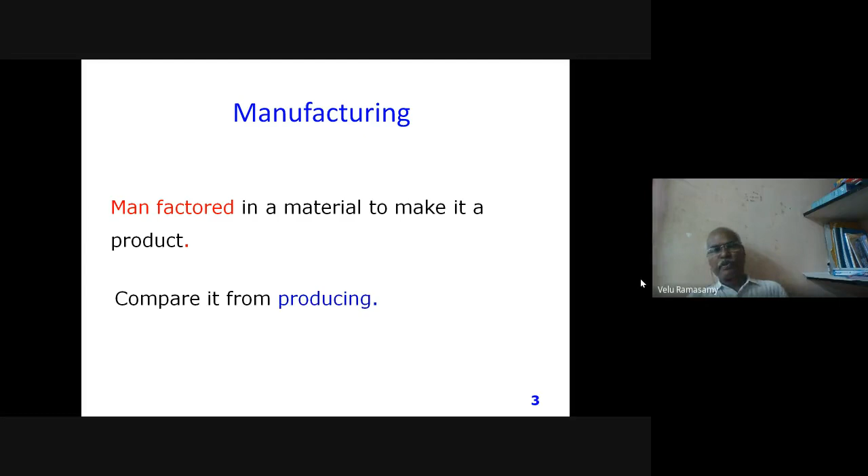Coming back to railway passenger coach - manufacturing is over, and railway passenger coach is something everybody would have seen or traveled in. It's an entity to carry passengers, to carry human beings safely, speedily, and quickly - that's why it is called a coach. The difference between traveling by a lorry or an Ashok Leyland bus and a railway coach is totally different. Railway passenger coach is an entity primarily used for carrying passengers. Compare it to a railway wagon - nobody would like to travel by a wagon. Only one poor fellow, the guard, will be traveling in the last wagon of a goods train, and it will be terribly difficult. But passenger coach is ultimately comfortable - the ride index you cannot compare with anything.

Before proceeding further, since we are going to see manufacturing of railway passenger coach, we will understand what are the subsystems or components in a passenger coach. Broadly, for discussion purposes, we will have the shell superstructure - something like our ribs and webs - then there will be one bogie, called the carrying truck, below the coach, and of course interior furnishing where we sit, sleep, or eat. So these three make a particular railway coach.

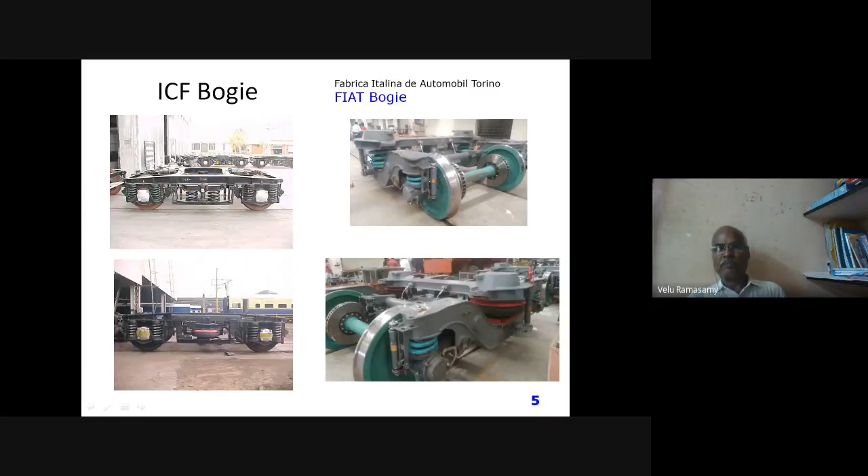So now you can see how simply Fiat has made a bogie, and right from last year, Indian Railways is manufacturing only these types of bogies for our passenger consumption. These others are slowly being phased out. Interior furnishing - everyone would have seen interior.

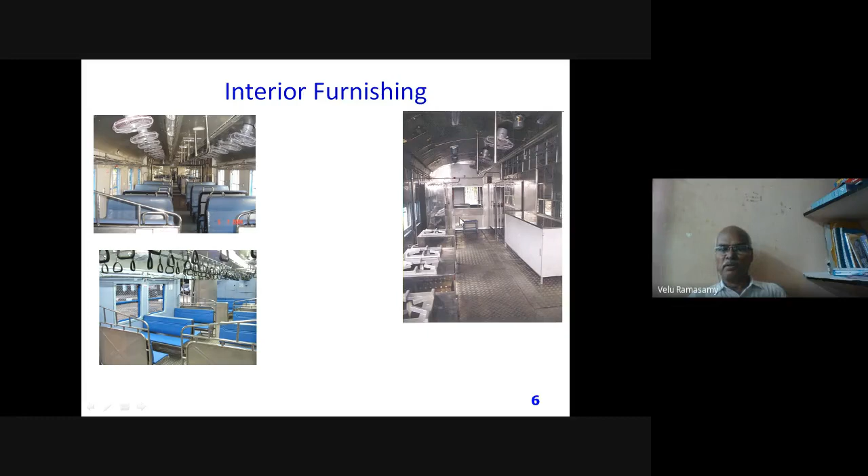Interior furnishing consists of fans, seats, windows, doors, etc., and flooring. Here it is a chair car. Here it is an electric multiple unit that is running somewhere in Bombay or Madras or Calcutta. And this is the pantry car. You would have read in newspapers that slowly Indian Railways is going to do away with pantry cars. But without a pantry car, you cannot imagine a train. Technology is changing though, and everywhere we will be having eatables, so they are slowly doing away with the pantry car. But you can see a wonderfully furnished pantry car, perhaps when you travel in one.

There are three designs that we have been using in our Indian Railways. The first one is the Indian Railway Standard Coach. These were used right from the first train that ran in India, in Bombay, up to perhaps the 1970s. The design was purely British, and you could still see some MG coaches running in remote locations - it is purely riveted construction. Like if you've seen the Howrah Bridge, the entire bridge has riveted construction. In those days, railways did not believe in welding because welding was in its infancy. There was a heavy underframe, something like a chassis in an automobile, and the coach superstructure was constructed over the chassis. So the body was a wooden body. You can see it now perhaps only available in a museum.

The heavy underframe over which wooden body is built. What is the problem here? Since it is heavy, you will be having high power needed for hauling, and the speed will be obviously slow.

Compartments are fewer. Imagine Tamil Nadu Express or Karnataka Express will have 27 coaches. If you haul IRS coaches, you can haul only around 13 or 14 coaches.

And this next one is very important. In case of an accident, one coach will telescopically enter another, meaning it will slide and physically enter the other coach. So you can imagine what will happen to the people sitting in that particular coach.

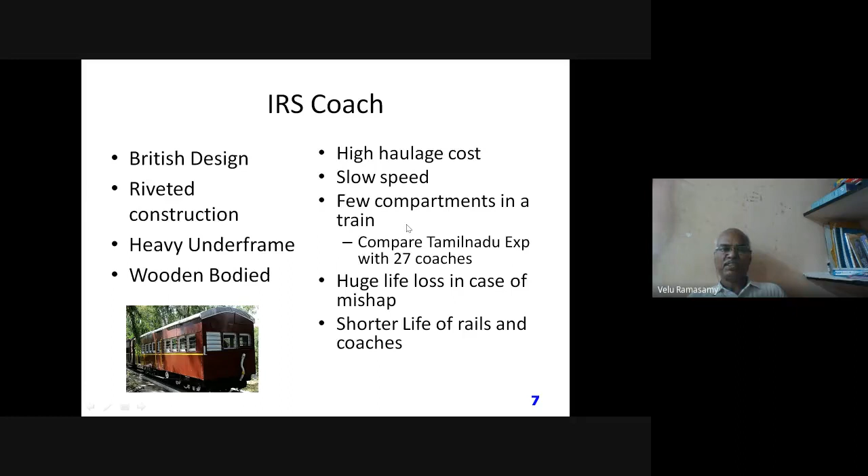Therefore, we have a subsequent coach called the integral coach. Integral coach means the sidewall, roof, and underframe are all completely welded. There is no chassis, there is no wooden body. All are steel and all welded together. It is something like a tube. That's why it's called an integral coach.

The previous one was a chassis built over which a wooden coach was constructed. Here it is integral construction, all welded. By the 1950s, Indian Railway got confidence to go for welding rather than riveting. Riveting is a very cumbersome process, and slowly people wanted to leave riveting behind.

And since it is all light metal, the weight is very less, and the outer sheet will always be in tension. So even if you throw a stone at it, the stone will just bounce off without making an impact. It was also designed to go around 110 km/h.

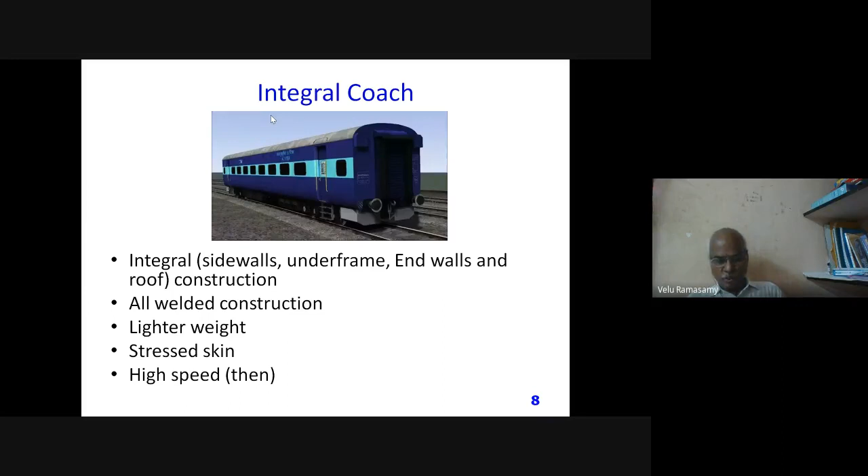Then the Integral Coach Factory was established way back in the 1950s. The third design, which is now manufactured by all the manufacturing units of Indian Railways, is the LHB coach, Linke Hoffmann Busch coach.

You can see, previously I told you about FIAT bogie and LHB coach. Yes, you are right, this coach is a combination of two designs. The superstructure design is LHB, whereas the bogie design, the undertruck design, is Italian.

The advantage of the LHB coach compared to the ICF coach is an enormously higher level of safety compared to the Integral Coach Factory coach. The riding comfort is very nice, and the speed can reach around 160 km/h operating speed, with weight being 10% less.

That is around 35 tons, so 10% means 3.5 tons less. And it's a longer coach. In an ICF AC coach, you have perhaps 8 bays; here you have 9 bays. One bay means 8 seats. So you get around 15 to 20% extra space.

And maintenance is of course very much reduced, and the aesthetics have improved enormously. So these three types of coaches are running in Indian Railways.

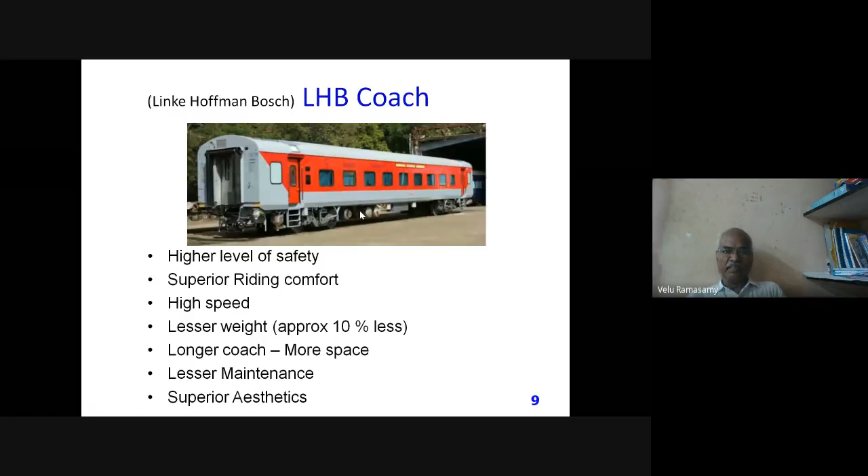Coming back to ICF, where these coaches are built: the Integral Coach Factory started in 1955 by then Prime Minister Jawaharlal Nehru. Initially it was started for manufacturing only 100 third class coaches. You wouldn't have seen any third class coaches, but initially it was started for only 100 of them.

And perhaps this is the irony: even Germany gave a design called the MAN design. You would have seen MAN trucks, heavy duty trucks, in India too, but due to certain reasons we couldn't use that. But now, once again, Germany rescued us with their LHB coach.

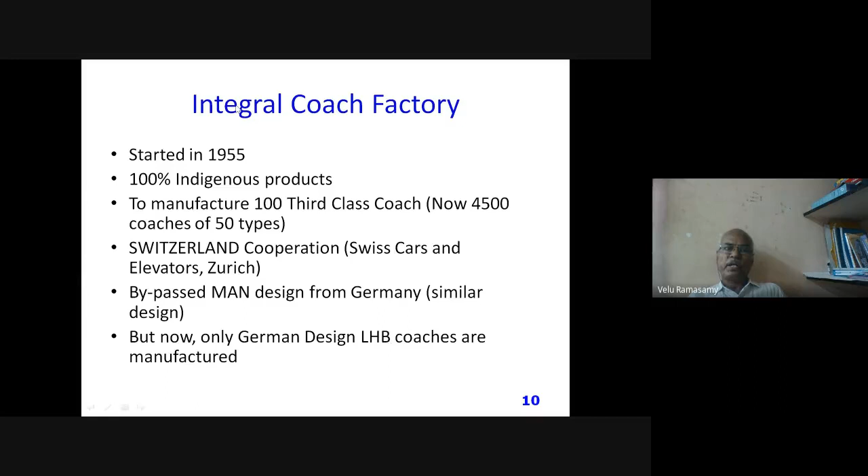So coming back to our production or manufacturing, we take inputs such as sheets, plates, rods, and these rudimentary items, and of course paints. We perform only elementary operations: shearing, bending, milling, welding, fitting, painting, and of course inspecting.

No complicated activity like forging or broaching or something of that sort. Only simple activity, because it is simply rail dabba, a sheet metal body. So the output is conventional passenger coaches or self-propelled coaches like electric multiple unit, diesel electric multiple units, special coaches like inspection cars, and so on.

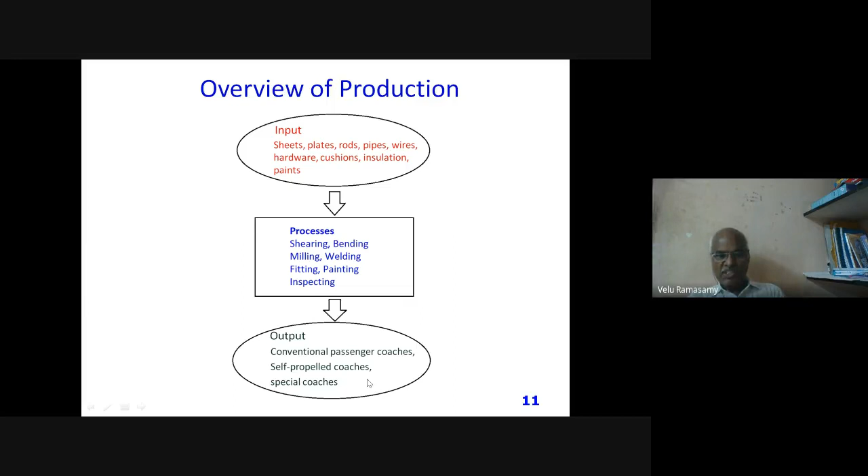Integral Coach Factory here has a layout like this. You would have studied in engineering that we have different types of layouts: product layout, process layout, combined layout. ICF uses all types of these layouts, and that's why it is called a hybrid layout or combined layout. At one side, raw materials enter and get processed. Slowly it moves, and finally when it comes out, it will be a railway passenger coach.

Here inside the factory, you can see all types of layouts, whether it is a line layout or product layout, cellular layout, process layout, fixed position layout, office layout, retail layout for canteen, something like we use in malls, and so on. That is the layout by which Indian Railways manufacture any railway passenger coach in Madras Integral Coach Factory.

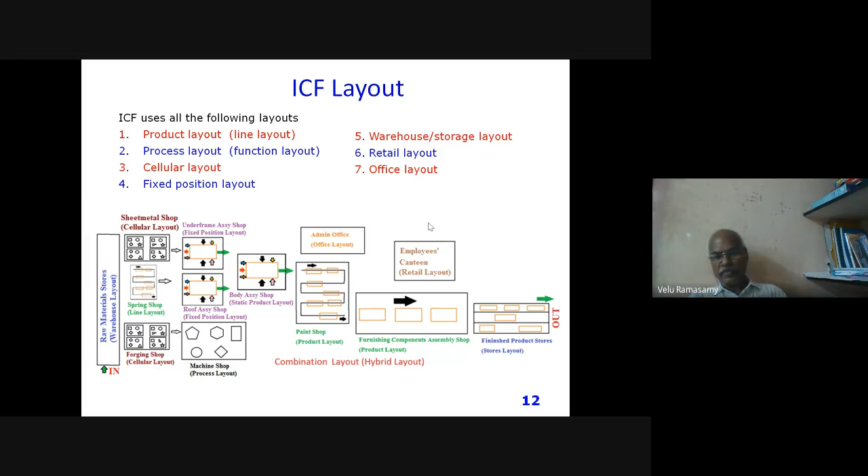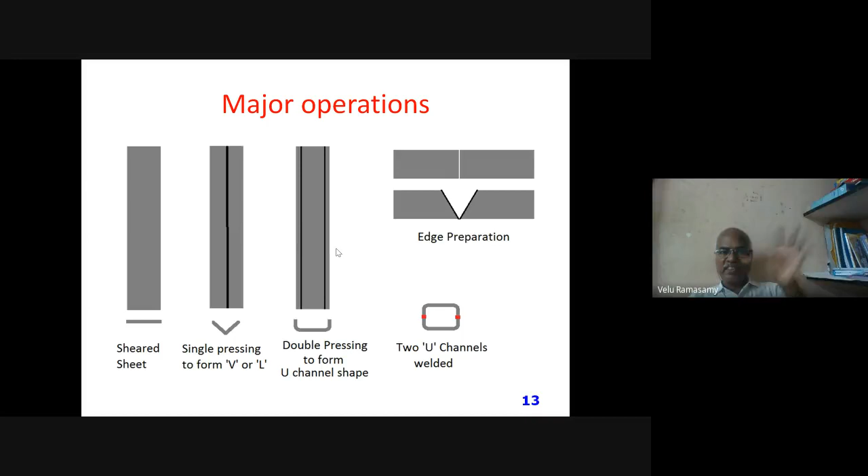So major operations are very simple. Since it is sheet metal, or either light sheet metal or plates, we use shearing and single bending or double bending, edge preparing, welding, drilling, and fitting. Only that much. There will be around 3,000 components in a railway passenger coach, but mostly only these operations make the entire coach. You would not be believing, but that is the reality. The coach might be appearing so big and so complicated, but using these right from the scratch, we make the coach. And in the sheet metal shop, we use sheets, and we use shears for cutting.

Previously we were using mechanical shear, and slowly technology is advancing. Now we use CNC laser shear that we'll be seeing later, and we'll be pressing it into different shapes. We'll be using welding for joining the sheets, and then we moved into laser cutting and automatic seam welding, and so on.

Previously, we used to transport sheets, cut sheets, in lorries, but now you would have seen in trucks, very big rolls coming. So you cut for 23 meters, there will be no joint. But previously, you could not transport 23-meter long sheets. So you had to have either 8 feet or 10 feet sheets, something like that. Then for 23 meters, there would be 4 or 5 joints. And you know, joints are very dangerous. Boundaries are very dangerous — that's where failure starts.

But now this is a development — we are using cut-to-length sheet and cut-to-length machine, and thereafter, if you want, you will weld using laser.

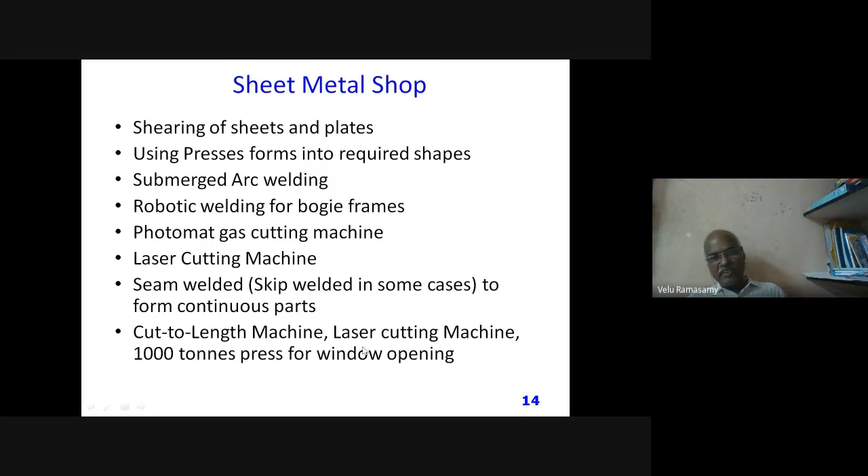This is a typical bay. A factory will have sheds or shops, and shops will have bays, and a bay will have so many workstations. Here you can see now we are using only laser cutting, and if you can cut, you can use the same laser for welding also with slight modification.

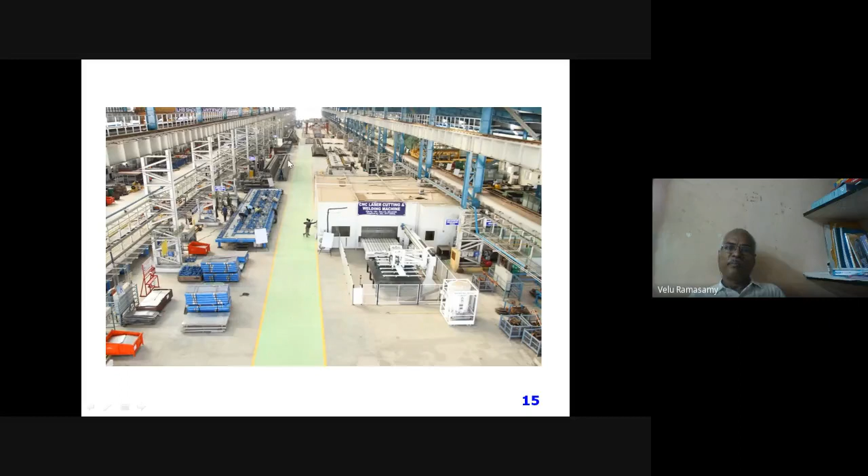And we get sheets in rolls and we cut for whatever length requirement. Here you can see this length is around 21 meters. On the other side there will be the roll, and when it is hauled, as per the length we will cut and then process. There will not be any joint in between. Wherever it is not avoidable, then only we will use one.

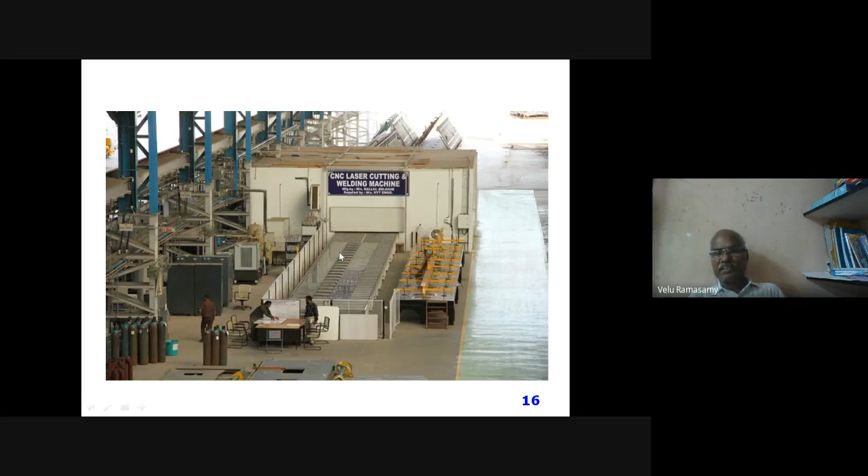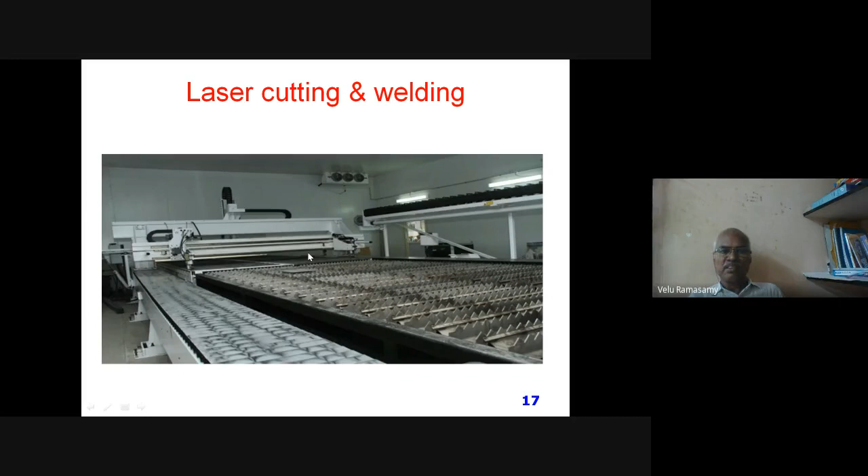Again, manual welding is predominantly reduced. We have switched over to robotic welding, laser welding, plasma welding, and so on. This is the outer structure where you can see a laser cutting machine. The interior will be like this. So sheets will be processed here, and as per the profile of the operation needed, the head will do shearing or welding as per your requirement. This is the interior portion of this particular machine.

So similarly, we also have plasma cutting. Laser is predominantly used for sheets up to 5 mm, whereas plasma is used for heavy duty plates. It can be done otherwise too, but this is how we have been using it.

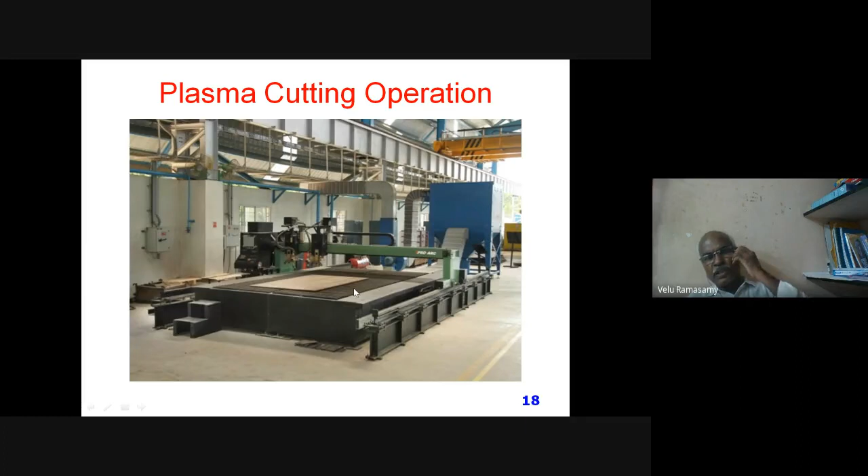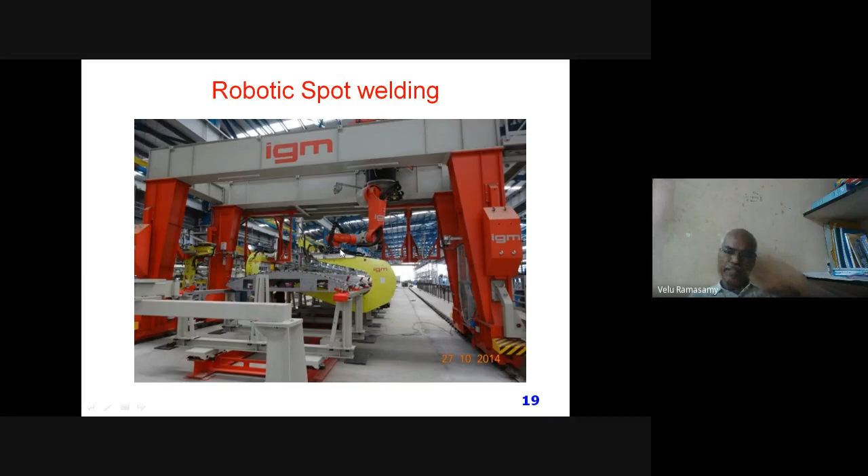Nowadays we are using robotic spot welding. Since sheet metal coach body is a sheet metal item, you need not weld continuously - it will be only spot weld or seam weld. Wherever it's the roof, it should be continuously welded. For side wall and other places, it will be spot welded. This robot is used for spot welding.

And a shell is made using 2 side walls, 2 end walls, 1 underframe, and 1 roof. There are only 4 items: side wall, end wall, underframe, and roof. The underframe is made in a particular shop called the underframe fabrication shop.

Here heavy channels are used only for side channels, and these sheets will be corrugated. Everything will be manufactured in a fixture. We are manufacturing around 4,500 coaches, so we cannot measure and do each one manually. As you would have studied in production technology, fixtures are used to improve productivity. So we use channels and plates, and the final output is the underframe.

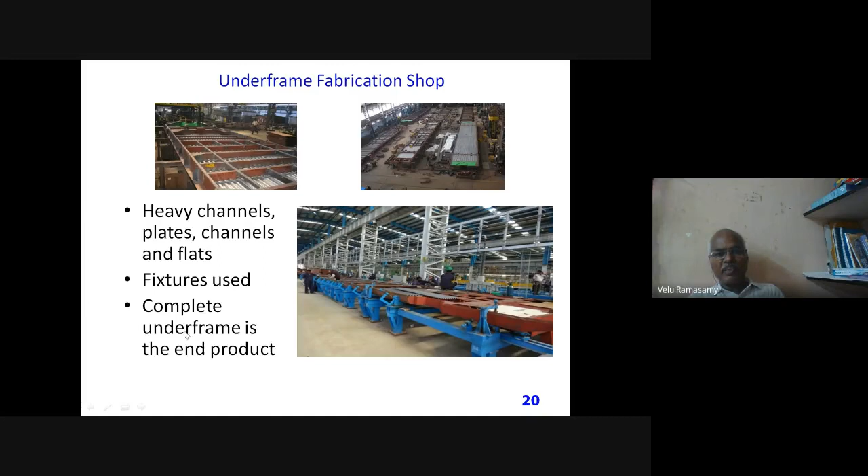You can see in the subsequent slide - we initially keep 2 side channels, and thereafter we weld all the cross channels. Thereafter you can see the corrugated sheet.

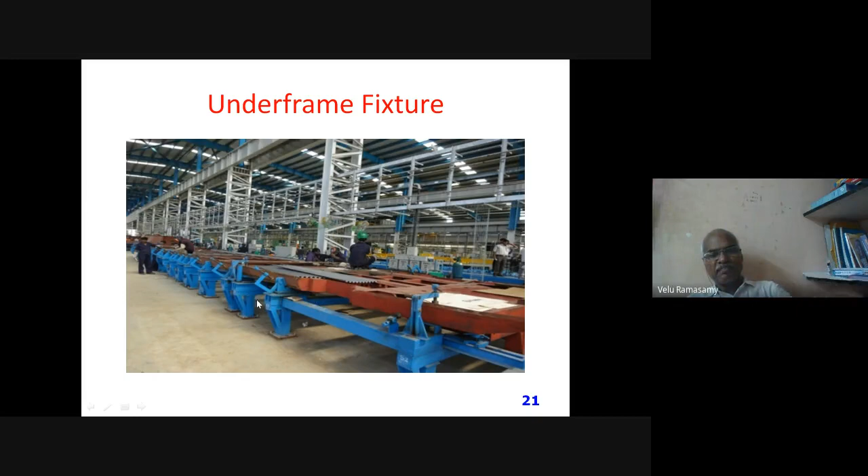Corrugated sheet is strong, as you would have studied in strength of materials. We don't use a plain sheet - we have corrugated it so that the strength is increased because the section modulus is increased. That is elementary strength of materials. So we just fix it in the fixture, and wherever welding is needed, we just weld.

You can see this is the underframe fabrication shop bay. You can see the top portion - this is one side end of the coach and the other end of the coach. In between you can see the channels are light, and there are no heavy duty items like this.

The purpose is: at the end you will have the doorway, and the doorway is the weakest section in a coach. Whenever 2 coaches collide, doorways will be crushed. So in order to avoid excessive crushing, you have heavy duty frames at the end of the coaches.

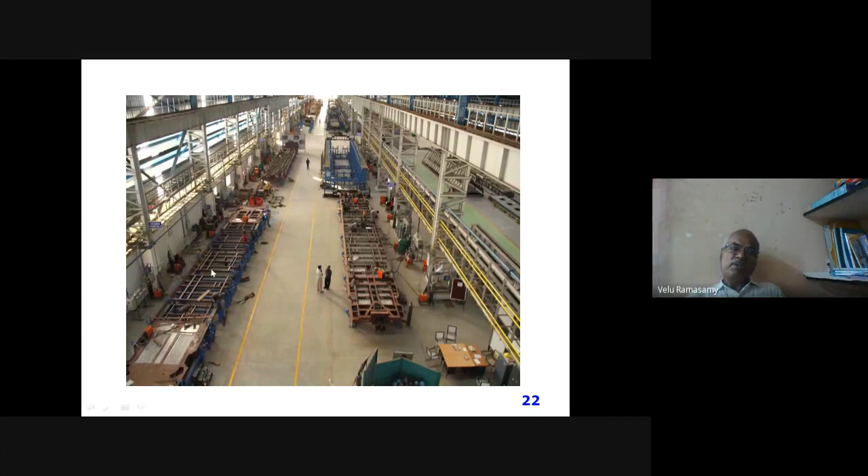And the second thing is you will be connecting the coupler here at the end, so the coupler will be transferring the haulage force throughout the body to the next coach also. That is the second reason why the end has very heavy metal, whereas in between the coach, the structure is not that heavy.

So this is the first step of the construction of the underframe, and you can see the almost finished underframe - it is inverted, this is the bottom portion. When you look from the ground, it will look like that. Here we have rotated it using our fixture for finishing it, so a completed underframe will look like that.

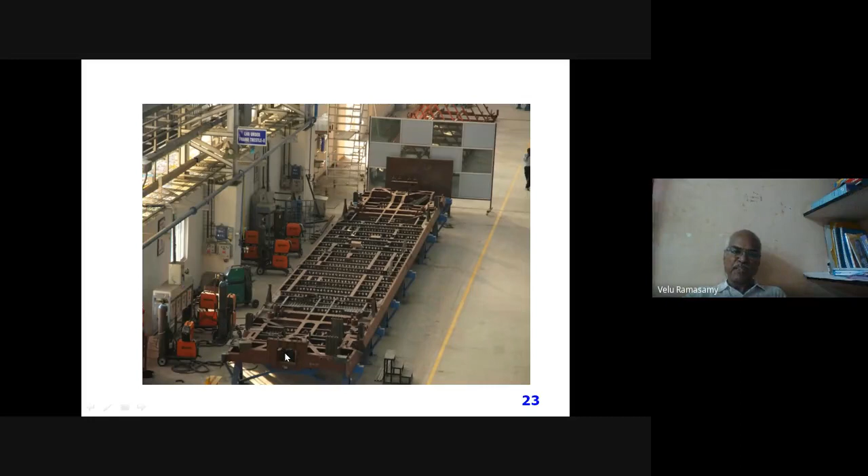In this slot you will be fixing something called a coupler. It is a kind of American design - a center buffer coupler. You cannot see buffers here like in old coaches. Only one coupler will be there, which is capable of transferring around 150 tons without breaking.

So now we have come to the point where we have made the underframe. Now you can see here the end wall as well as the side wall. You can see the windows in the side wall - this is one side and this is the other side of the side wall.

Here again, what are the raw materials? Sheets to cover, and ribs and webs - all are only sheet items, bent to our requirement. That is why, since we are making it using sheets of 2 mm or 3 mm, not more than 5 mm, the coach is light in weight.

If you use a 10 mm plate or 15 mm, 20 mm, then instead of a railway coach we will be having only a ship hull, which is very heavy, and only 5 coaches will be running in the Kerala Karnataka Express. So sub-assemblies of sidewalls are completed in the sidewall end wall shop.

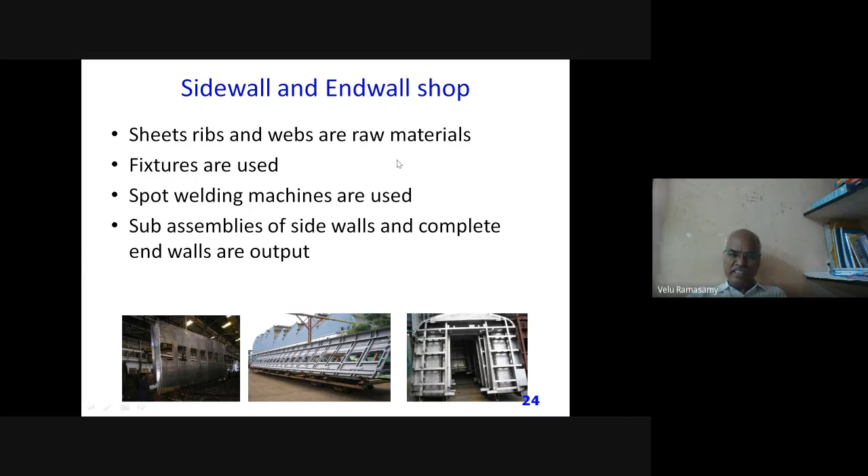We will see again, it is a similar process, a similar way. You can see there the underframe will be continuously welded, whereas here it is skip welded or spot welded.

You can see a complete fixture for making the sidewall. There are 2 fixtures over which you will place the frames and weld, and you will finally place the sheets and skip weld or spot weld. You can see people are working there. This is the complete jig or fixture.

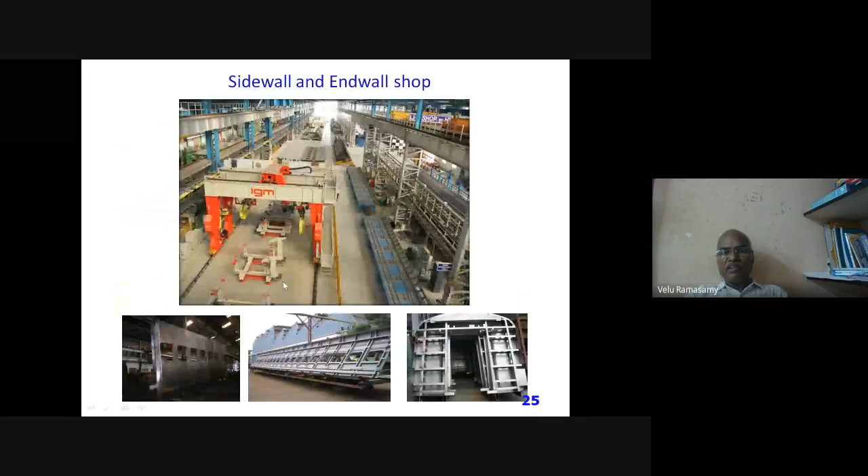It is a fixture over which we will place the longitudinal channel, cross channel, and then place the sheet and finally weld, giving this particular output called the side wall as well as end wall. Now we are coming to fabrication of the roof.

Fabrication of roof, there are 2 different types. Old is ICF, you can see a plain roof. Whereas now we are making LHB coach that will be having a corrugated roof. As told in some previous slide, corrugated sheet will be having enormous strength compared to plain roof.

Here again the raw materials are sheets, angles, channels, ribs, and so on. And the fixture diameter is 4 meter diameter and 22 meter long. There will be 5 or 6 circular ribs like this, over which we will place the longitudinal frame and the crossbars and so on. Finally, we will place the sheet and we will make it.

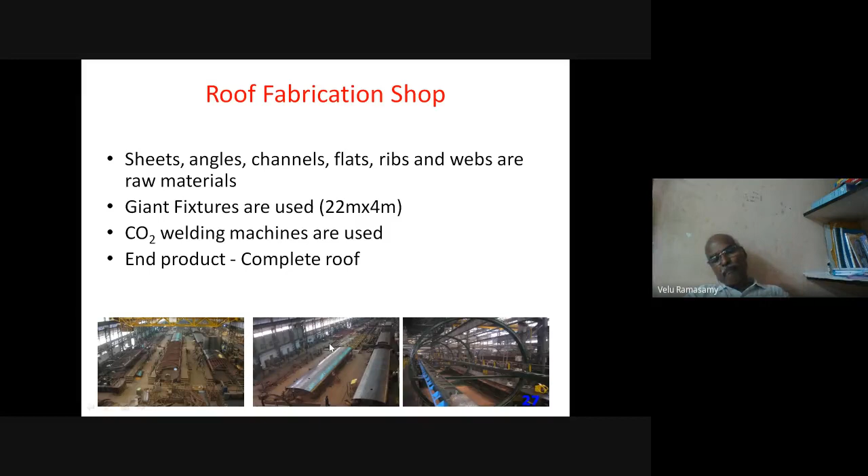Here you can see, initially we have provided only the structure, shell structure. Thereafter, we will cover it with the sheets to make a complete roof. Now let us see, you could have observed the difference between the previous roof and this roof. The previous roof, the sheet is plain, whereas here the sheet is corrugated.

Please keep in your mind, in integral coach, even the roof takes some of the load of the contents. Whereas in our wooden body coaches or buses, only the chassis will have the load, the sidewall and roof will not be having the load. Whereas in tubular construction or integral coach construction, even the roof has to take the load. That is why you can see the corrugation.

You could have seen the fixture over which you will be placing the ribs inside and place the sheet, tighten with the band, and then do the continuous welding. Because in the roof, there will be continuous welding. Otherwise, when it rains, you will have shower inside the coach.

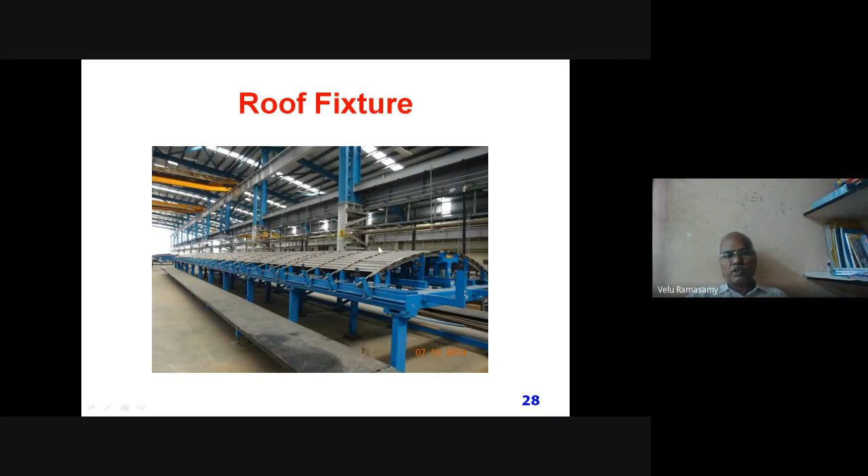You can see the roof fabrication in a detailed way here, starting of the roof, and finally when it goes, we have completed here. You can see cross rails or cant rails. Cant rail will be longitudinal rail, and car lines will be cross lines. They will build, and finally they will place the sheet, and finally roof will be complete.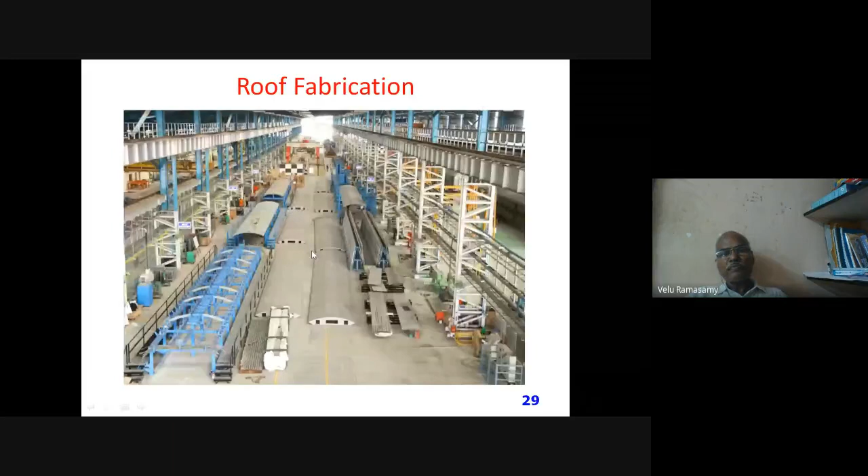Now we have made underframe, we have made sidewall, end wall, we have made roof, and now all the 4 assemblies, sub-assemblies should be brought together, and you have to make a shell body like this. So all are brought, and skin tensioning I will tell later a little bit what is that.

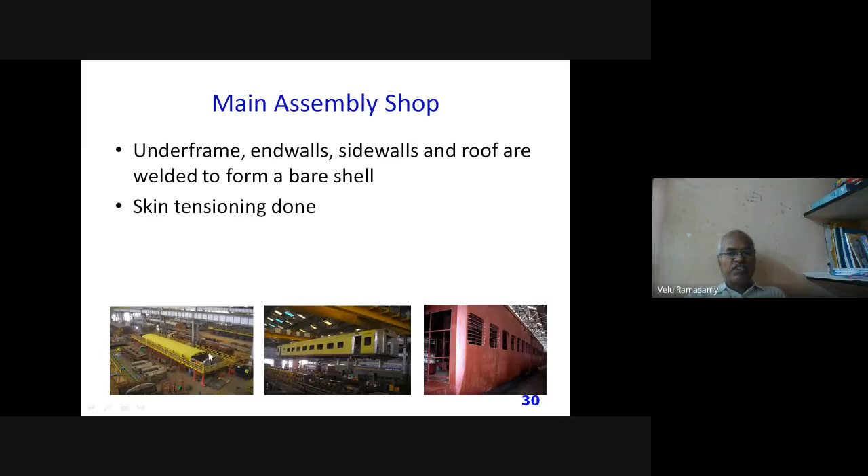Here only manual welding is done because it is practically difficult for making any robotics welding or similar sorts of welding. Manual welding is very much used. Of course, since you are making for entire length, even if you are not going to have a kind of sound welding, still it doesn't matter.

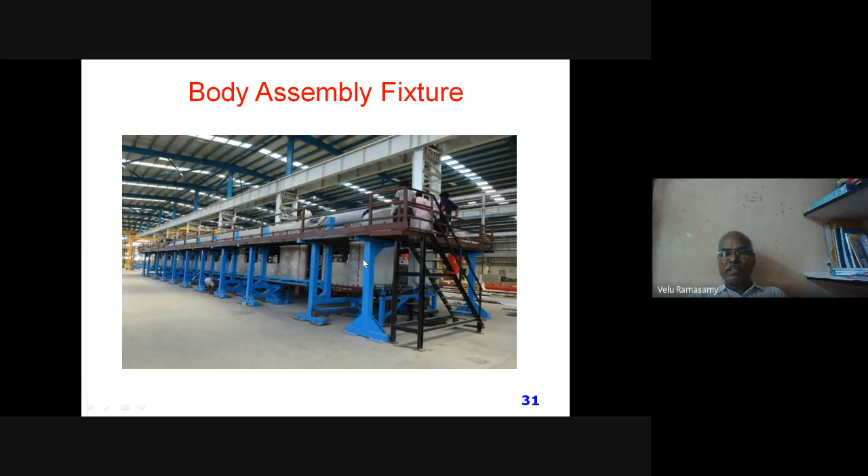Whereas for the all details, robotics are used, and laser or similar advanced weldings are used. So after keeping all these subcomponents in the body assembly fixture, they will weld. After completing, they will lift the shell for further processing.

One more thing has to be noted is the underframe main structure will be of high strength carbon steel, something like Corten steel, C-O-R-T-E-N. It is very high strength steel, corrosion resistant, copper pickled, and aluminum killed. It will take a quite long time for corrosion. Whereas the shell superstructure is of stainless steel.

One can ask, sir, why can't we use stainless steel also in the underframe? Even if we use stainless steel, it is very difficult to bring corresponding strength. Normal steel is very easy to fabricate when the thickness is around 15 mm also, whereas if you take stainless steel of 10 mm plate, it is very difficult to fabricate. That is why we adopt Corten steel, high resistant, corrosion resistant, high tensile Corten steel for underframe, whereas stainless steel for the other structure called sidewall, end wall, as well as roof.

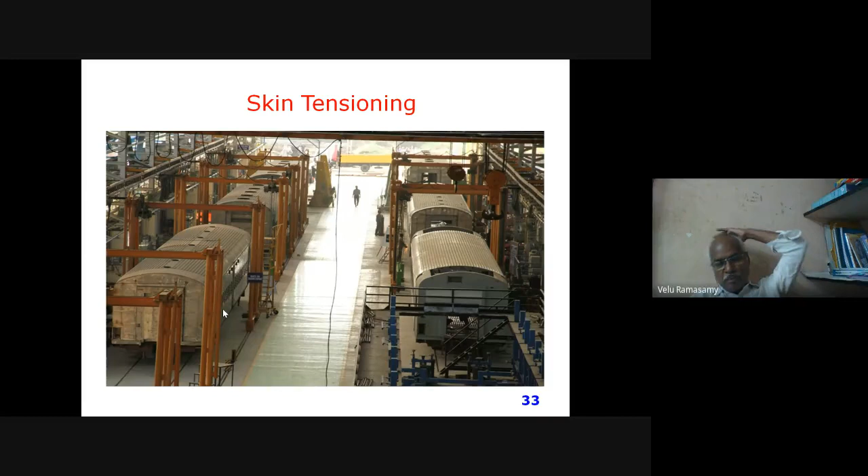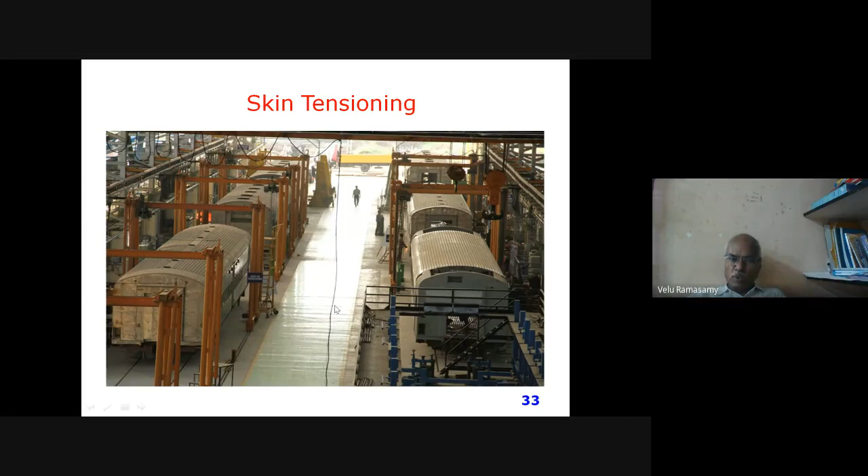One more point: all the components - sidewall, end wall, roof, as well as underframe - are sharing the load of the coach. Therefore, when the sidewalls or sheets are under tension, it will be comfortable to transfer the load. That is the concept of skin tension.

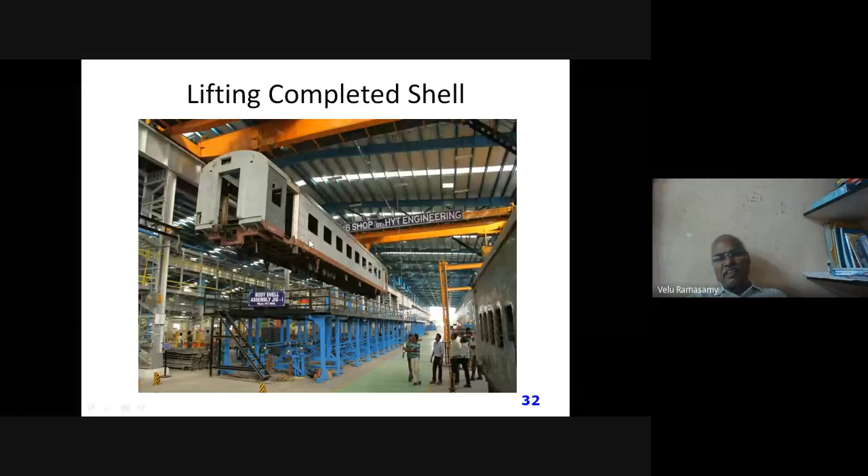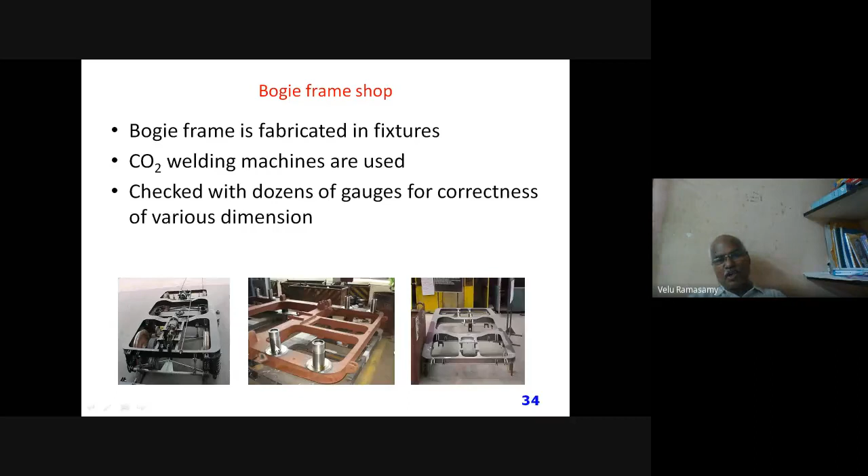Now instead of the old ICF design, we are making the new LHB bogie design. You see here how complicated the old one is - how many rectangles, how many channels, and so on. But here there are only two side channels, and the two side channels are connected by two circular frames in between.

Only four pieces, and that is why the ride comfort of the LHB coach is far superior to our ICF coach. Of course the technology is new - it's something like comparing your Tata bus or Leyland bus with your Volvo bus. Volvo bus is the latest design, whereas Ashok Leyland and Tata designs are a little bit old.

So the completed bogie frame will be like this - this is a solid model, and this is a real one. We will be seeing how this is made, again from plates and sheets only.

Very simple - we cut the plates into required sizes, and there should not be any bend, so the plates will be straightened first, because the bogies support the entire load of the coach and help it travel.

If there is any problem in the bogie, it will have catastrophic consequences - accidents can just happen if the bogie is not proper. So we have to be very cautious, quality conscious, and strictly adhere to quality when manufacturing the bogie.

During the manufacturing of the shell, you can accommodate some improper quality also - not that we make a defective shell, but some tolerance is possible. Whereas as far as the bogie is concerned, you have to maintain extremely high quality, because this is going to be the running member and entire load bearing member. So the plates have to be straightened, and then we will bend them to the required shape.

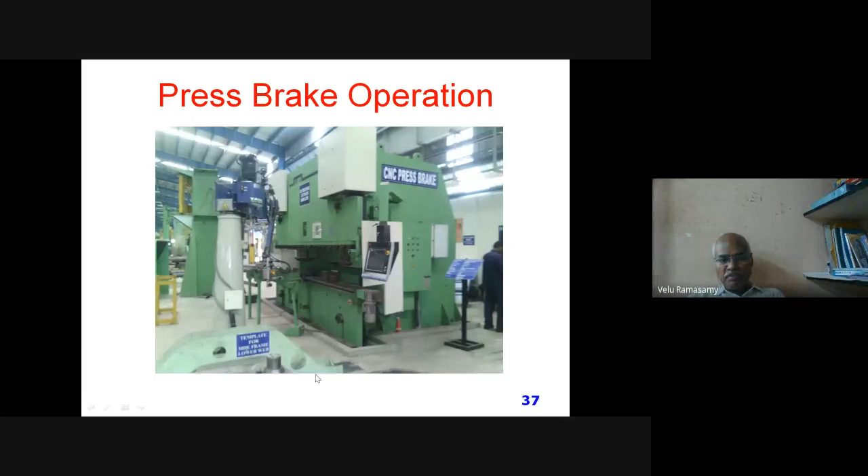We will be having a template for how to bend the sheets. You can see a template here, the shape of the frame itself, and the shape of the flange of the bogie frame. Can you see here? So it will be here. We will have one bend, here the second one, third one, fourth one, and fifth one.

So everything will be bent in this press brake, and handling. You can see the handling crane here using computer numerically controlled systems, so it can be manipulated in whichever way you want. This is one of the advanced machines ICF is having for making the bogie side.

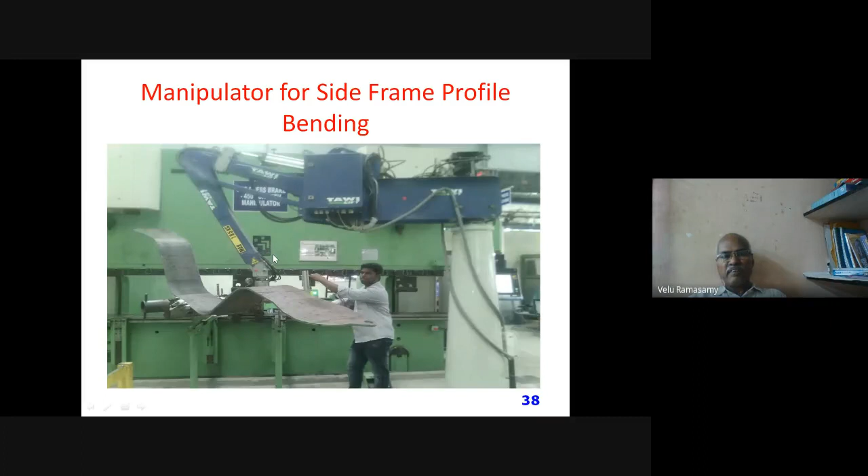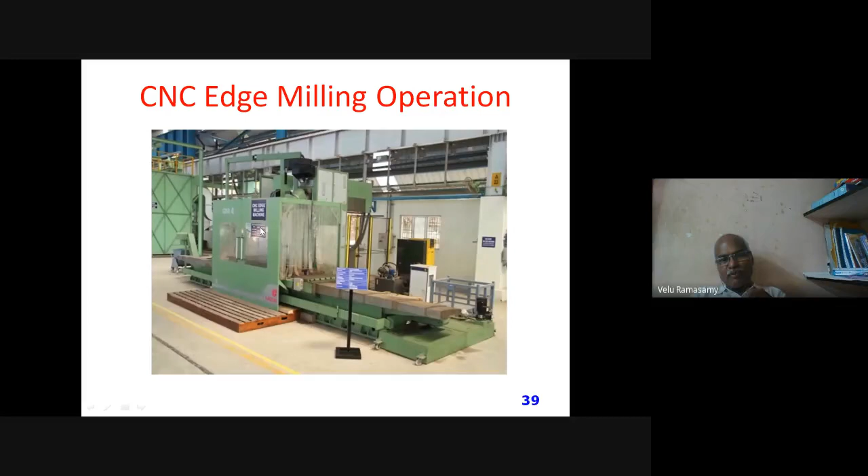After that, when you are welding thick plates, roughly 6mm or 8mm or 10mm, if you weld directly the welding will not be stronger. What we have to do is edge preparation, for which we have a separate machine for edge milling itself. Since we are doing mass manufacturing, we cannot provide for each and everything manually, so we have a specialized edge milling operation, and the plates are around 15mm thickness.

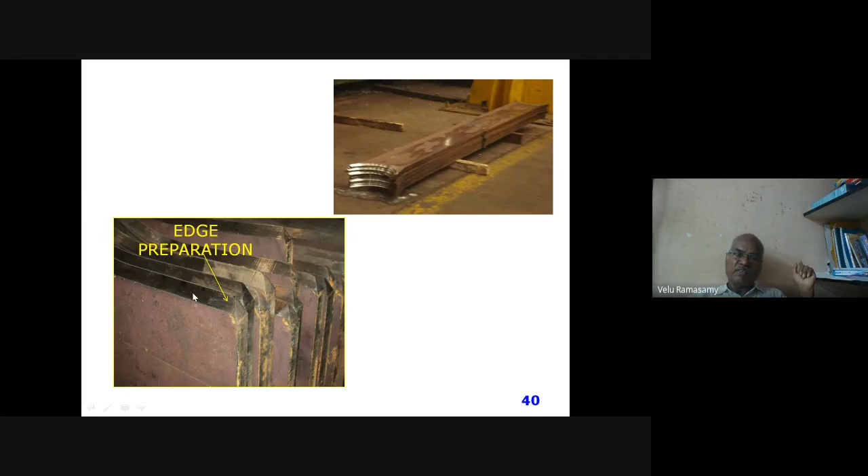16mm to be more precise. You can see how the edge is made, with a curve shape, because in the bogie frame we have two circular crossbars. So that will come here, and you will be butting two plates and welding them. If there is no edge preparation, the welding will not be up to the mark.

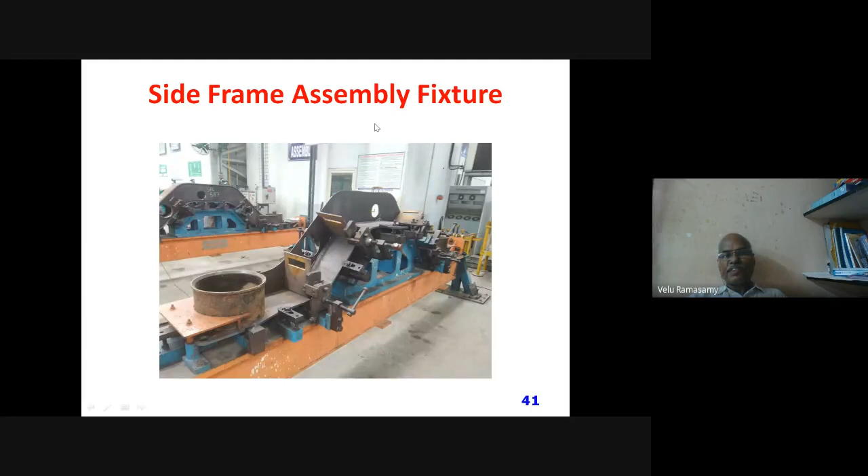Here you can see the welding, and in whichever way you want, you can manipulate. If you rotate the wheel, or switch on the motor, you can rotate in whichever orientation you want, because you have to weld on all four sides, and on all four sides the welding should be sound and of quality. So you will be using a welding manipulator to fabricate the frames.

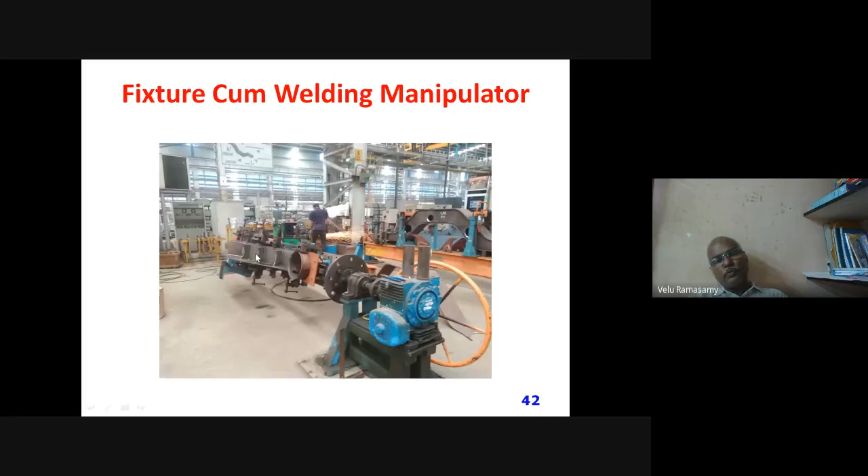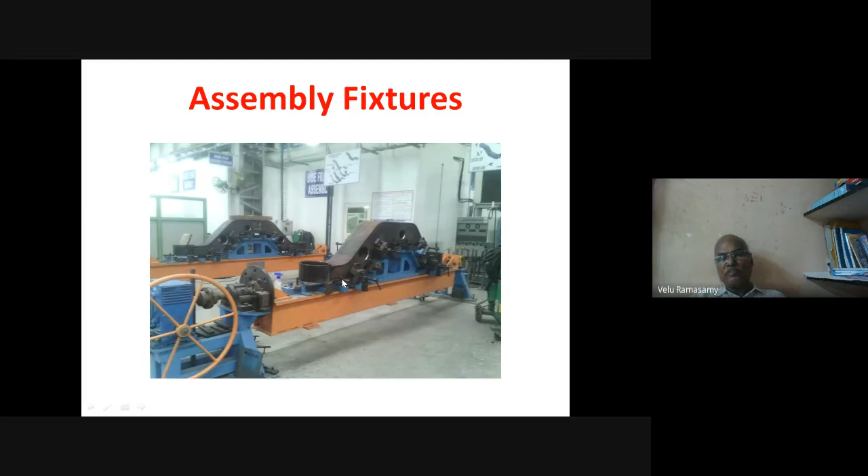You can see here again in different views. This is one side frame, and this is the second one. Afterwards, it will be connected using two circular bars. So these are all assembly fixtures, and in whichever way you want to manipulate, you can.

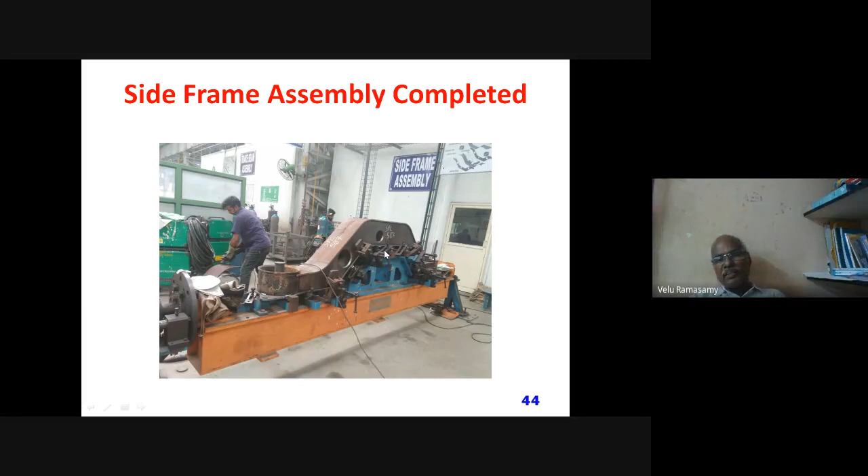Finally, they have completed the welding also, and it is ready for moving to the subsequent stage of manufacturing. You can see here the robotic arm is used for welding. Here it will weld here. Thereafter, you will be having two tables.

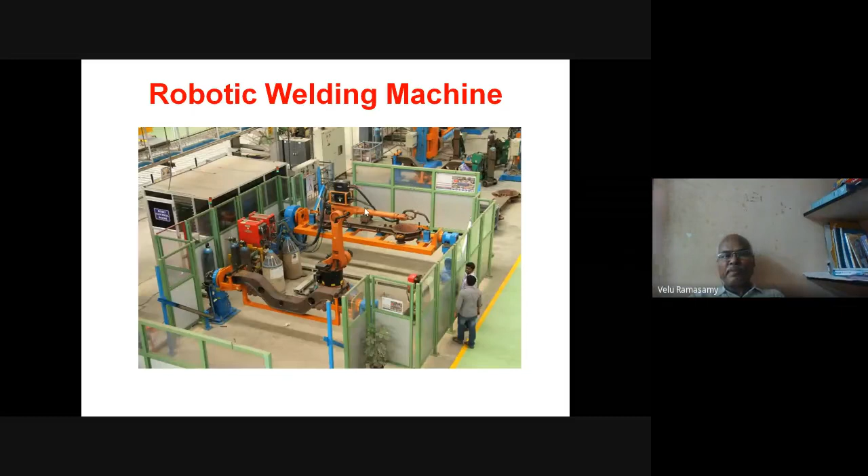At one table, when it is processing, you can load the other table, because you need not wait for loading and unloading. It will improve your productivity. Since it is a load bearing member, as we have told so many times, it has to be properly welded. So all the weldings have been carried out only by robots, and the welding is checked for 100% quality. No manual welding is permitted in our bogie frames. You can see a specimen photograph for robotic welding.

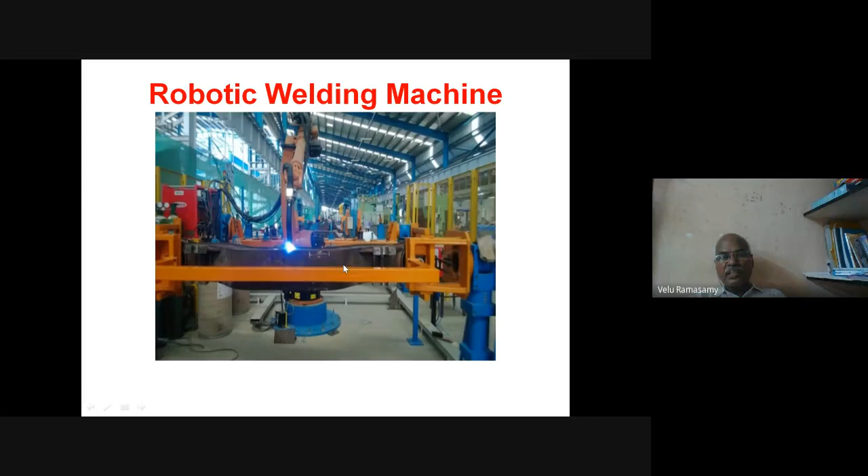Here, this is again one subsystem of the bogie. Finally, you have made two side bars and you are attaching two cross bars or tubes. Once these are all welded, the entire bogie frame is complete.

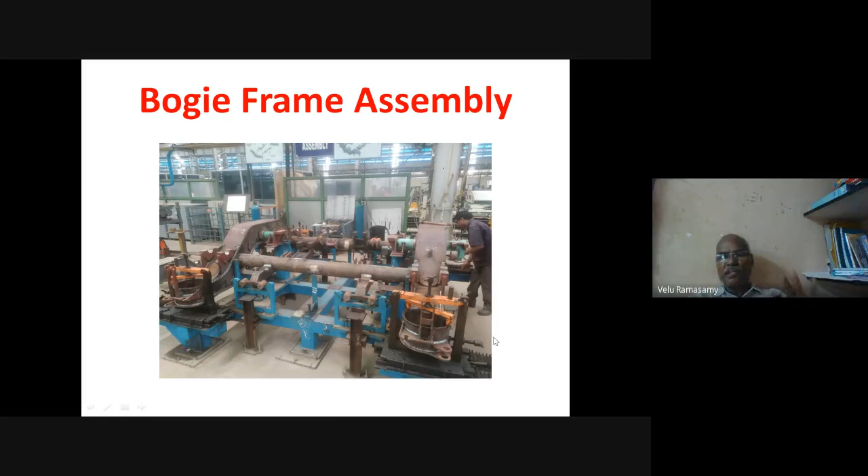You can see again this is one, you will place the frame here, one more frame here. Everything will have predetermined dimension, shape, fitting, and all those things, that is the advantage of fixture. Finally, you will be providing the two crossbars, and welding them, and the entire bogie frame assembly is completed. You will take it to the next stage, inspection.

And you know there are so many welds, and you don't know which weld is of what quality. So in order to ascertain 100% the quality of the weld, we will go for dye penetrant testing of vital joints.

You know, this portion of the bogie frame will be having enormous load. It's something like a cantilever. So you can see the color of the dye.

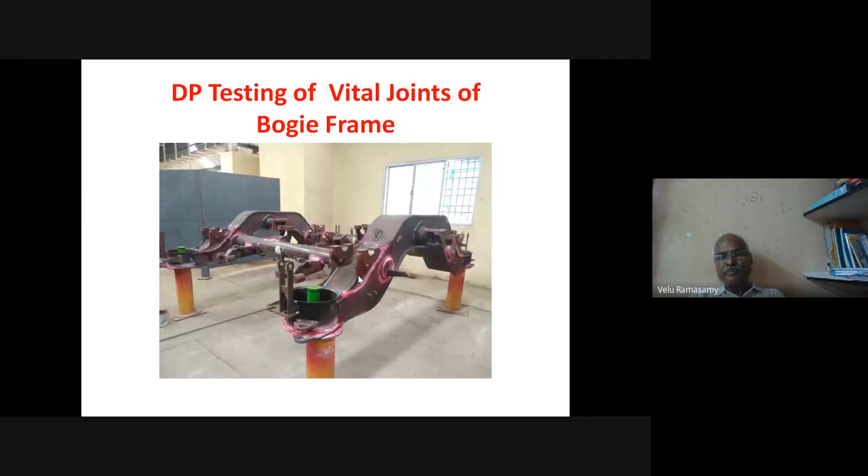This you would have studied in your metrology and measurement or testing, how dye penetrant is used for ascertaining micro cracks, pores, or other defects and disorders. So all the bogies are tested using dye penetrant test, and after dye penetrant it is simply kept, and it will be having some rust and so on. So as such you cannot paint because it is not blasted.

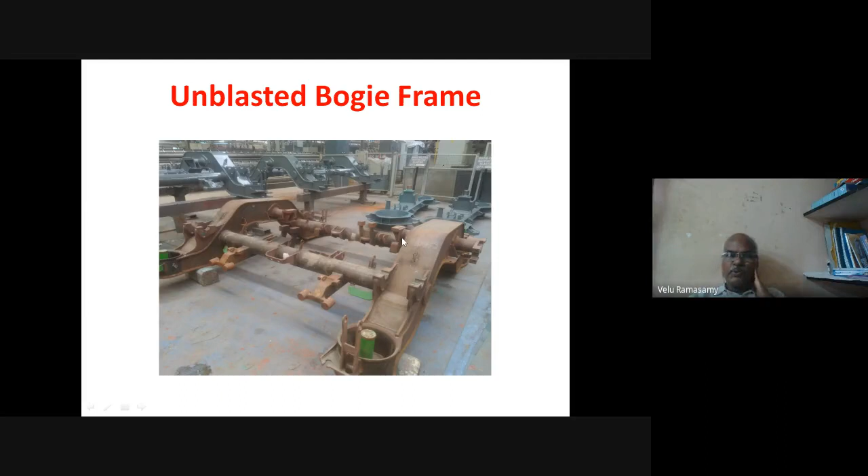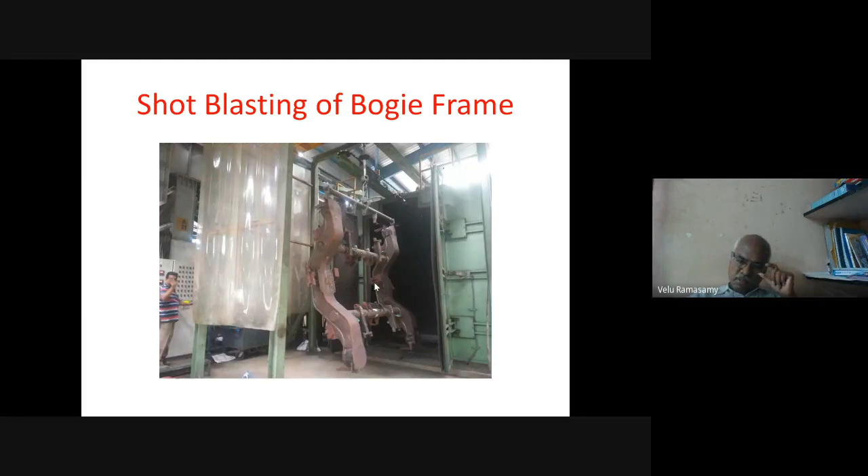One more reason for blasting is shot blasting also relieves the welding stresses. What we will do is take it to a blasting chamber, seal it inside, and blast some 5mm diameter spherical shots. It will be impinging at a certain velocity for some 10 minutes or so, and finally there won't be any rust or dirt, and it will also relieve, as you would have studied in heat treatment, most of the welding related stresses. The blasted bogie frame will be very pure and ready for painting.

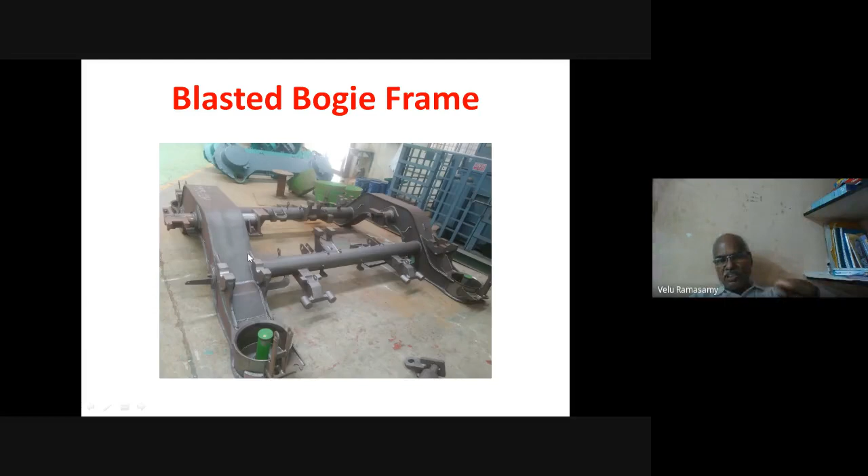Otherwise, again, it will have rust in no time. So after blasting, immediately we will take it and dip it into the red oxide. Finally, we will have the red oxide epoxy anti-corrosive painted bogie frame.

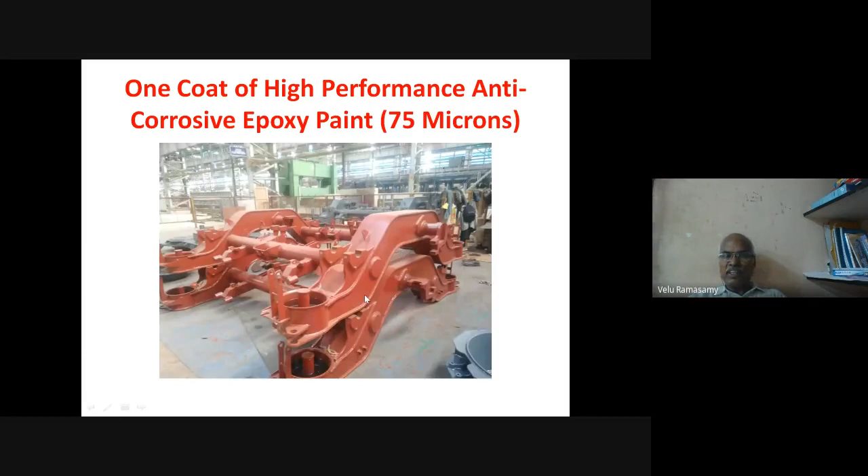As such, again, I emphasize, since it is the load bearing and running member, we have to take care of it more than we take care of our body parts. That is why, after this particular corrosive resistant epoxy red oxide paint of some sort, for 75 micron thickness, we again paint, again dip.

We dip the entire assembly in a paint tank. This is a kind of rubberized paint. For 200 microns, we paint the entire thing. Then we take it, dry it, and the frame is ready for further processing.

So shell is ready, bogie frame is ready. Now we have to make wheels, because the wheel has to be fitted on the bogie so that it rolls on. We get wheels from outside, perhaps in our country from Wheel and Axle, Yelahanka, Bangalore, or from Hungary and Bulgaria somewhere.

And for our consumption, what do we do? We initially bore the inner boss of the wheel using a specialized milling machine. We turn the axle, again getting it from the wheel and axle plant. We turn the axle, press the axle into the wheel, and make uniform diameter using a special wheel turning lathe.

The entire wheel and axle assembly will be turned, and both wheels' diameter should not vary by more than 0.5mm. The diameter of the wheel is around 1000mm, and here also it should be 1000mm. Otherwise, you will find so many difficulties in running the train, running the coach.

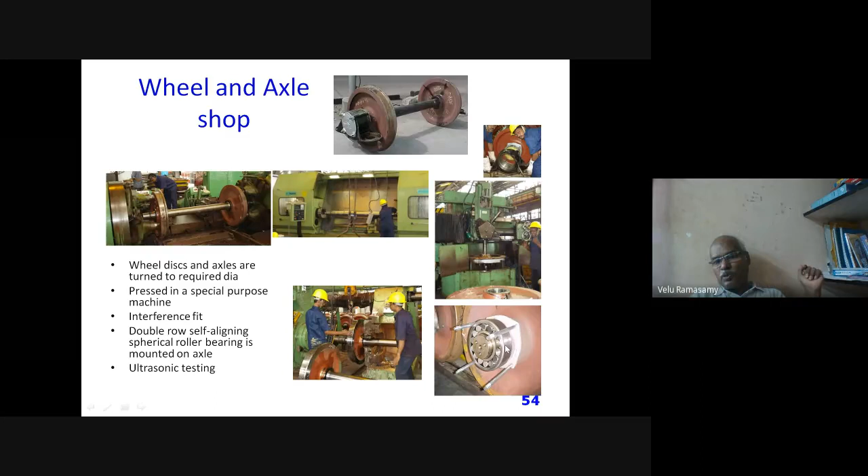So after making the wheel and the axle into one piece, we will fix a double spherical roller bearing, double row spherical roller bearing of self-alignment type. There will be 2 rows of spherical roller bearing because the weight of the coach is around 40 tons, so we have to have reliable bearings. There will be 2 rows and the balls will be spherical, and they will align themselves. After fitting the bearing, we will be housing it in the housing case.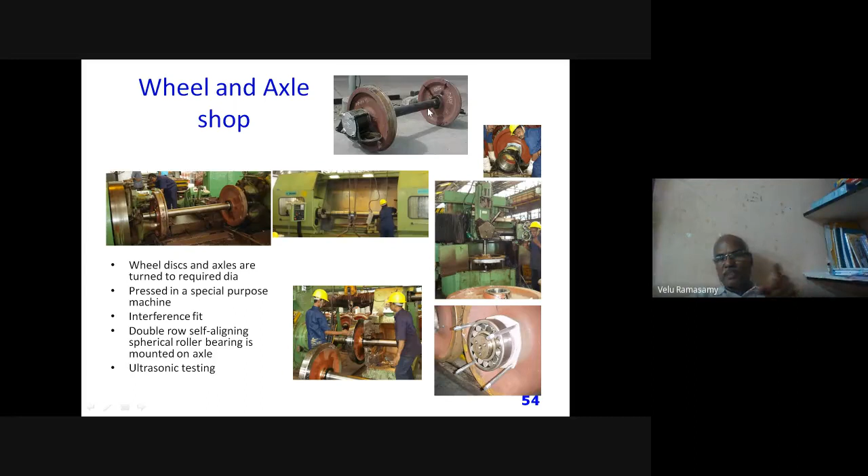Here you can see, finally you will be having a fitted wheel and axle set for our consumption. This wheel will be going and fitted into this frame.

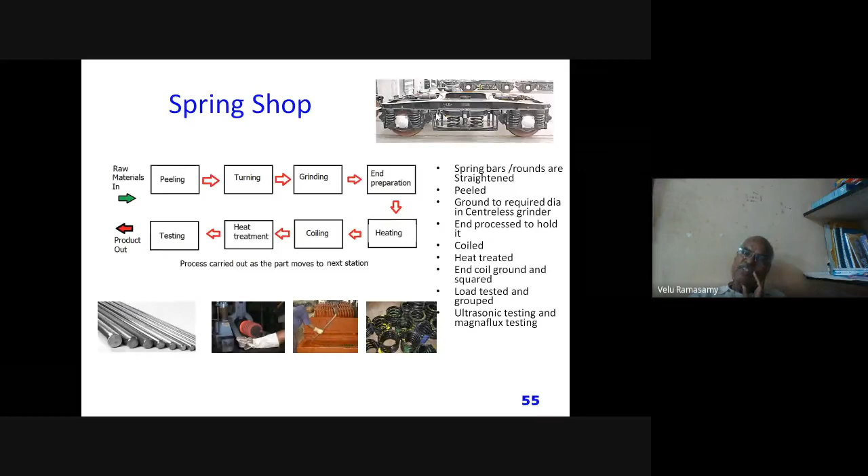Okay, so next, of course, whether it is ICF bogie or LHB bogie, we should have springs. If there are no springs, it is something like traveling on a tractor. You would have traveled by a bus or your bike, or traveled on a tractor. What is the difference in traveling? A tractor will not have springs, so each and every shock given by the road will be suffered by you.

So for spring shop, here you will be having bars and you will be peeling it because it should be of exact diameter, and you will be turning it to the relevant diameter, grinding the surface because a spring, if you would have studied in design, is very sensitive in the skin.

If there is any small crack or dent in the spring skin, it will immediately break in a single cycle. So you will do grinding, prepare the edge so that you can hold it, heat it, and coil it. You can see red hot material being coiled, and it is heat treated because there will be enormous stress during coiling.

After heat treatment, painting, and grouping, springs are classified as stiff, weak, or soft, and grouped by different colors - you can see yellow, green, blue. Birds of the same feather flock together, something like that. Springs of equal strength are grouped, and finally each spring is tested before being used for bogie fitment.

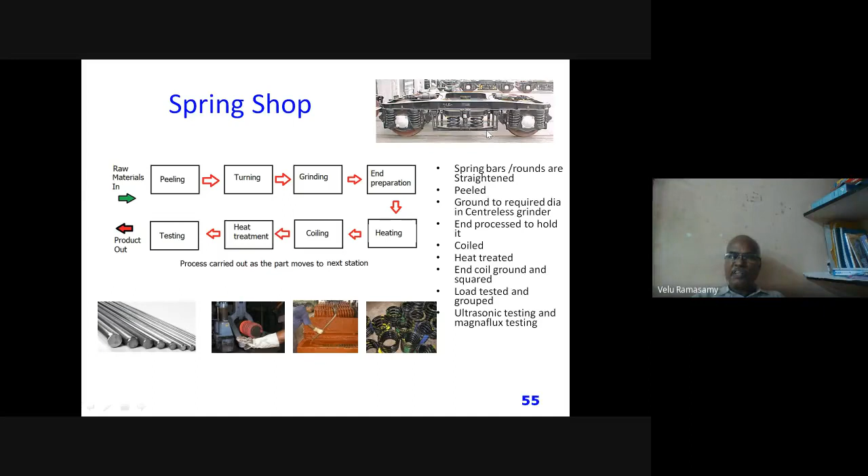So spring is there, wheel is there, frame is there, and now we have made the entire bogie. Spring is fitted, wheel is fitted - you can see there are 3 springs on your side and 3 on the other. Finally the bogie is tested to see whether it can withstand 20 tons, because a coach weighs 40 tons, so one bogie has to withstand 20 tons. We test whether it can withstand that, otherwise we have to redo things.

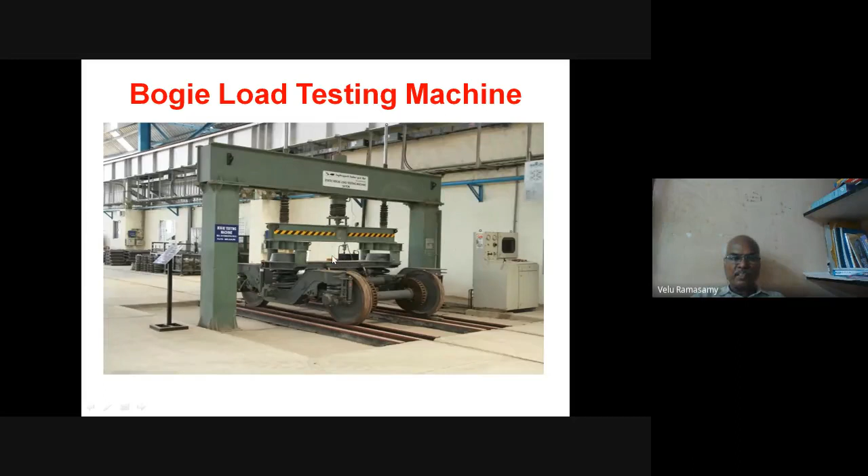Now the entire shell is moved to a place called the grit blasting shop, where it is prepared. Grit blasting is a preparatory stage for painting. You apply the putty, and then using an automated painting plant, you paint with different colors. The roof will be painted here - we paint the roof gray and the body green, or whatever color you want.

Finally, it is taken to another place called the oven, where the paint is dried. You need not wait 2 or 3 days for the paint to dry - it will be dried artificially in 6 or 8 hours, so the coach is thoroughly painted and dried.

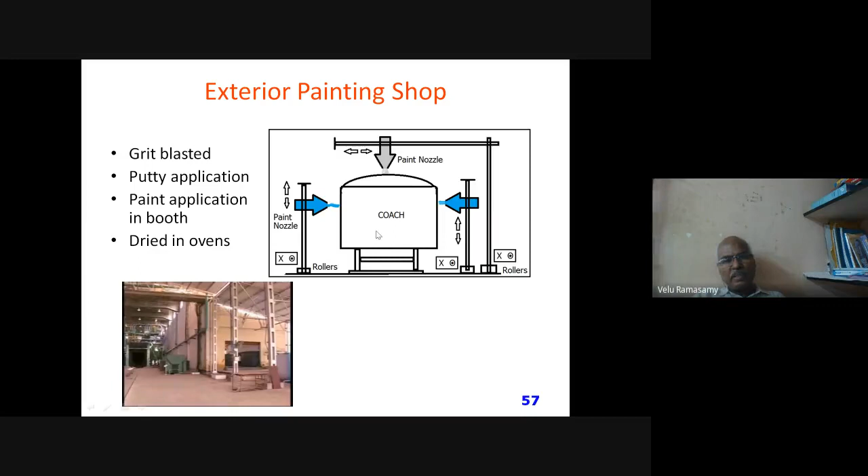Then finally you lower the completed coach onto 2 bogies, in a place called the lowering and wheeling shop. The entire superstructure is placed on 2 bogies, then various key dimensions are checked. The coach is also checked with a rainwater test, otherwise you cannot do interior furnishing, and then it is dispatched.

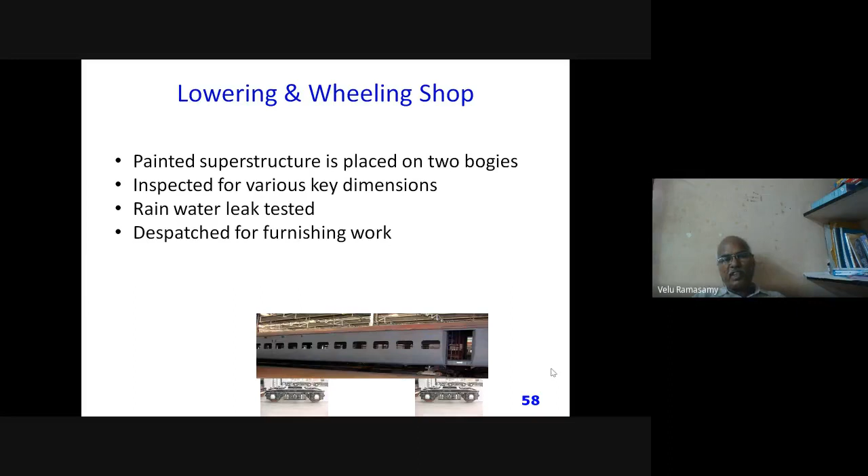Now it is a completed shell, and you have to carry out furnishing activities. It will be moved to the furnishing shop. In the shell shop we saw raw materials like plates, rods, sheets and so on. In the furnishing shop, what are the raw materials? As with any manufacturing process, we should know the raw materials, the processes, and the end product. In the furnishing shop, raw materials include flooring sheet, whether wooden or aluminum sheet.

You will have lavatories, so plumbing and lavatory fittings, windows and doors. If there are AC coaches, roof insulation, ceiling, AC ducts, and so on. Finally, we will be paneling it using laminated plywood sheets, or even stainless steel sheets, or nowadays FRP - fiber reinforced plastic panels, ready-made panels like we find in aeroplanes.

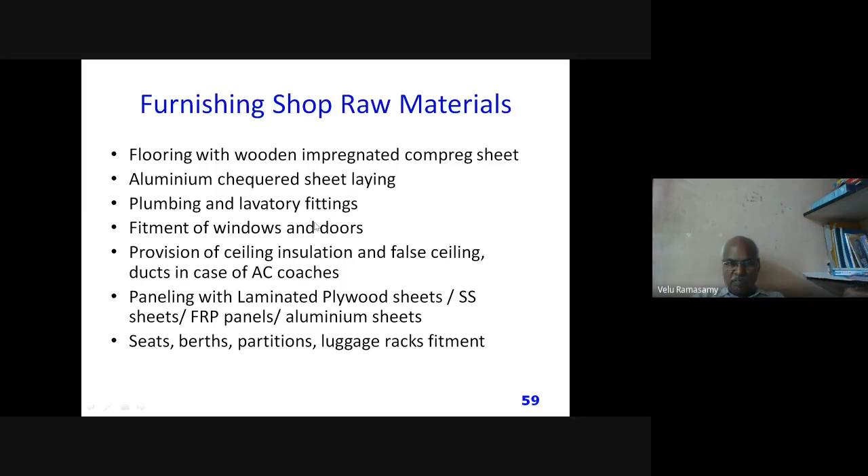We are nowadays also going for aluminum sheets - an all-aluminum body coach is being made as a trial run. Finally, we need seats and berths for sitting and sleeping, and for keeping luggage we will have stainless steel luggage racks. So all these things are raw materials for furnishing. When the shell enters one side of the furnishing shop as a shell, it leaves the other side as a completed furnished coach.

There will be around 10 stages. As the shell moves through each stage, first we do flooring, thereafter aluminum checkered sheet, plumbing and lavatory works. Then windows - there will be 2 windows - and whatever types of doors we fit, we provide ceiling insulation so that sun heat does not come inside. For AC coaches, ducting work, and so on, and finally we fix the seats, berths, and luggage racks.

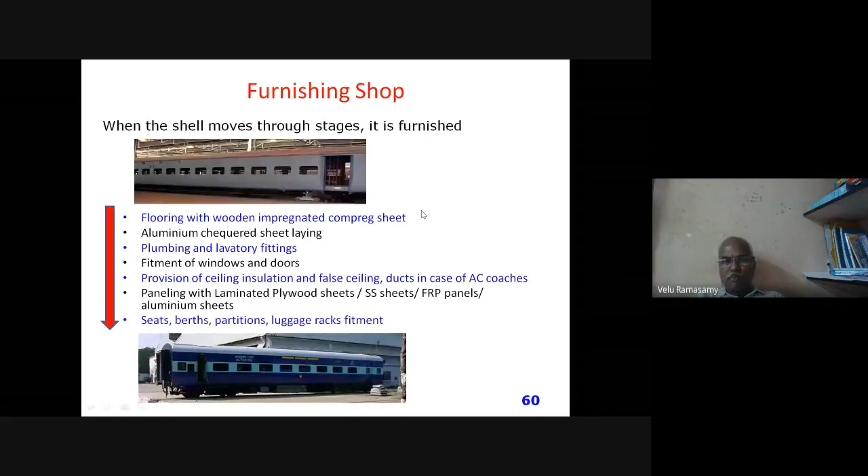Now the shell would have been transformed into a wonderful coach. The entire process is carried out in the shop called the furnishing shop. Finally, we have the lettering. Nowadays we use stickers, we don't go for painting. We stick on so many letters and symbols. Once the stickers are done, the coach is ready for the next stage.

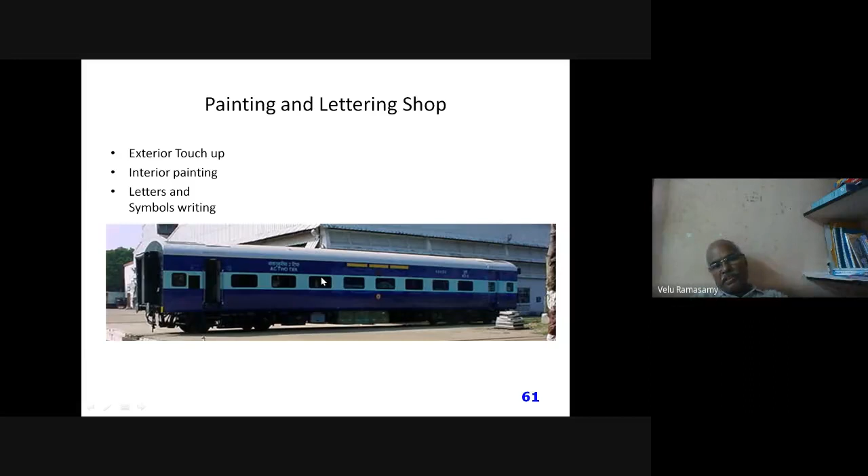The problem here is, if each and every time you brake, the wheel, which is a very load bearing member, will be worn. Finally, whether the wheel is worn by carrying you or not, it will be worn by continuous braking. And the wheel, as I told, is an imported item, very costly item. So slowly they thought, and finally we have got the caliper brake, or your disc brake, like in your Pulsar or whatever new cars, new bikes.

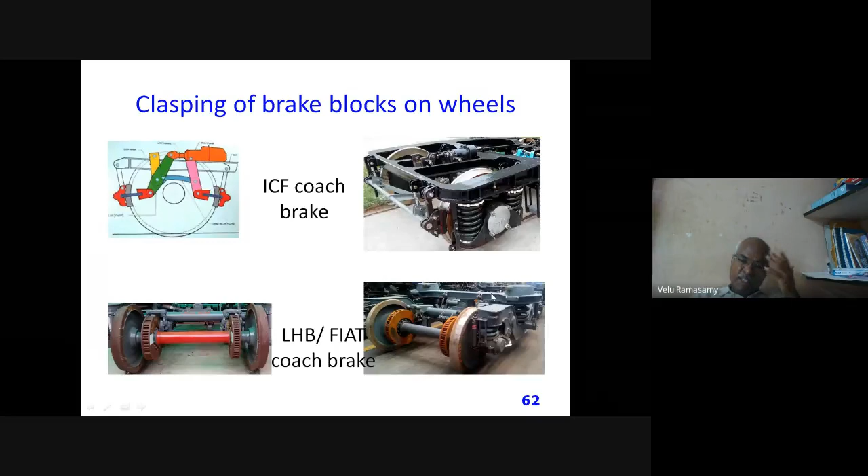Of course, in our Chennai Metro Rail Limited, the latest, we are using both types combined, because metro rail will be traveling faster and braking faster. So in order to brake, we use combined brakes of both types.

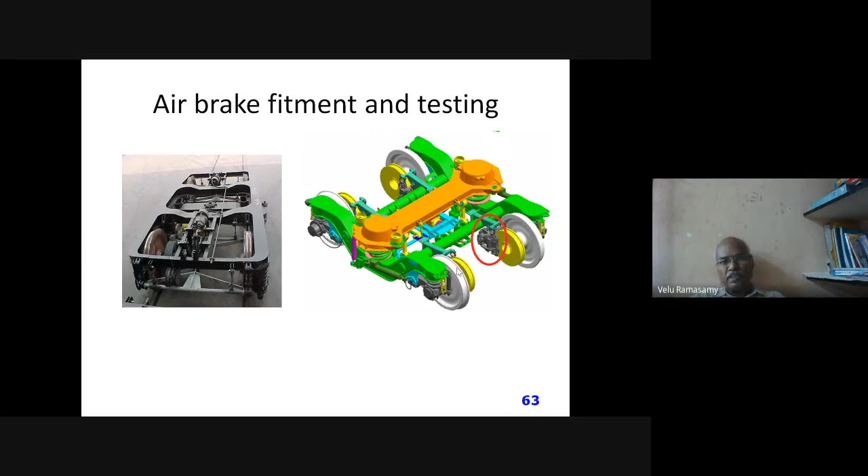So it is a completed coach. We have started from the sheet metal shop, and finally we received the raw materials as sheets, plates, rods, and so on, and we made a shell. For the shell, we had four subcomponents: under frame, roof, sidewall, end wall. We assembled it to form a dibba, and then we started taking plates, heavy duty plates, springs and wheels. We made the bogie, and we lowered the shell onto the bogie.

We grit blasted the entire thing, we painted it, we dried it, and we moved the entire shell to the furnishing section, where we fitted all the furnishing items like flooring, panels, seats, berths, and electrical fittings.

And finally, we have arrived at our completed coach. Okay, so in this roughly 1 hour session, we have seen 3 different designs of Indian Railway coaches.

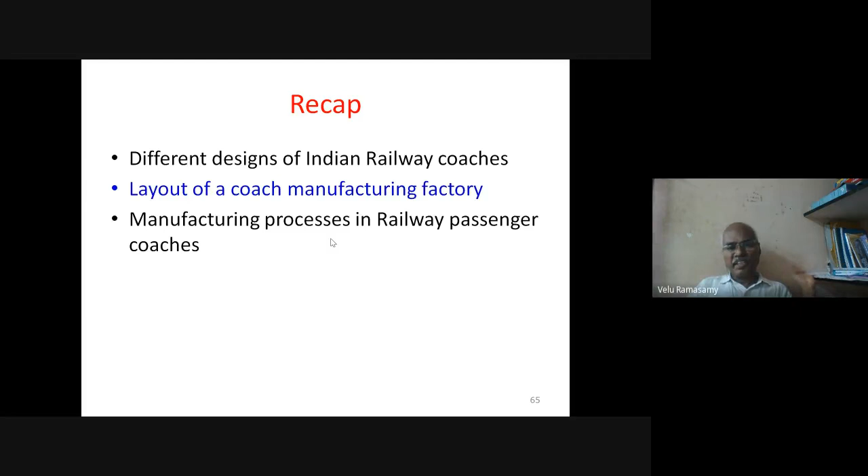Finally, we have seen elementary manufacturing processes like shearing, bending, edge preparation, welding, drilling, and fitting, followed by painting of railway passenger coaches. Thus we have made our railway passenger coaches.

So now, for any clarification or doubt, if you don't have any clarification related to this, I will also clarify what opportunities or work avenues, jobs, or anything else you want to ask. That's it from my side, Professor. So we have come to the question and answer session. If the students are having anything.

Yeah sir, Shakti Shavanan is asking one question, sir. Sir, how many days to produce one compartment from raw material to finished goods?

You are having 40 types of coaches, as I have told you. A general unreserved coach will take around 18 to 20 days, whereas an AC coach may take around 1 month. Other participants, if you have any queries or doubts, I can ask the speaker.

Others, whoever is having doubts related to manufacturing of coaches, please ask your questions or queries.

And perhaps after a sumptuous meal, everybody would be wobbling their heads. Don't worry, I'll be sharing the entire slide deck with your professors, and you can go through it at any point in time. Perhaps you can ask afterwards also.